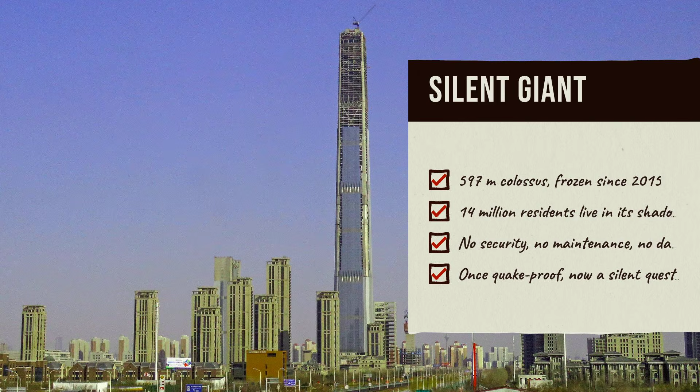For 10 years, a 597-meter skyscraper stood unfinished above a Chinese city of 14 million people. No security, no maintenance, no monitoring. Every typhoon season, the wind hit it. Every winter, the temperatures dropped.

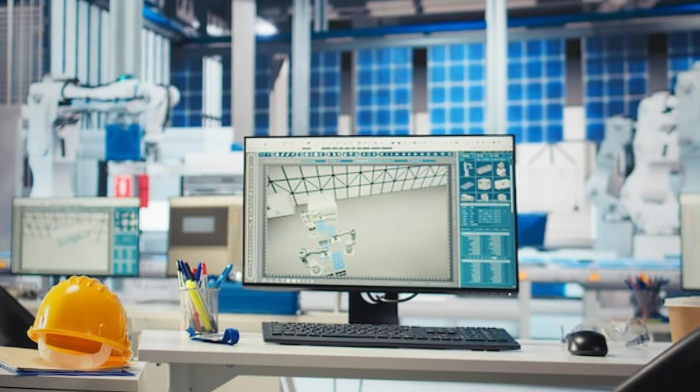The structural steel expanded and contracted, month after month, with no engineer watching the sensors. This building exceeded China's seismic safety code before construction even finished. Then it stood exposed for a decade. This is Goldin Finance 117, and nobody publicly knows what that did to it.

To understand how a $3 billion skyscraper becomes a ghost, you have to understand who paid for it. Pan Sutong was born in Shanghai in 1963 and grew up in Hong Kong. By his early 50s, he had built Goldin Properties Holdings into one of the largest real estate developers in southern China. Forbes estimated his personal fortune at over $25 billion at its peak. Pan wanted a trophy. In 2008, he commissioned the design for the tallest building Tianjin had ever seen.

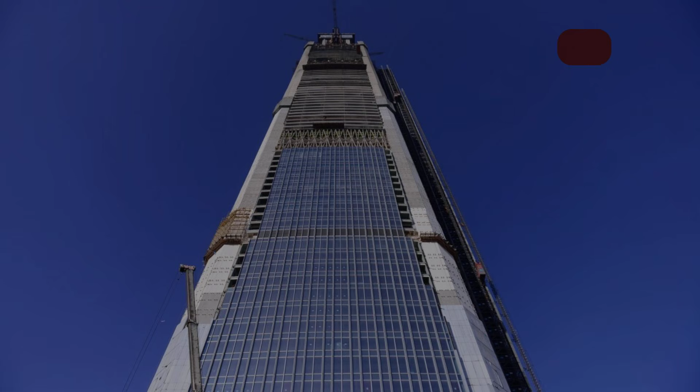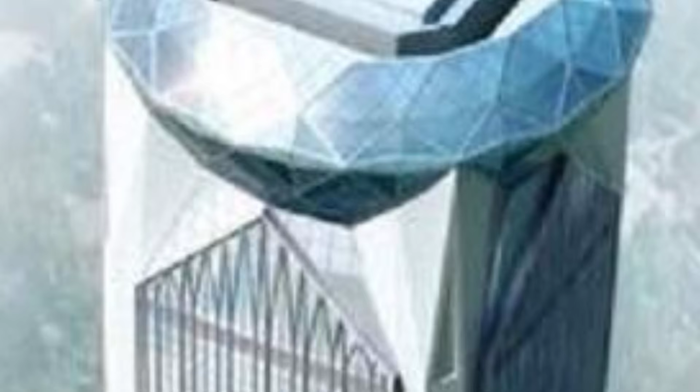597 meters, 117 floors, a sloping glass facade that tapered as it rose, giving the structure the silhouette of a walking stick. At the top, a diamond-shaped crown, roughly 80 meters tall, a glass atrium that would house a revolving restaurant, an observation deck, and an indoor swimming pool. All three would be the highest of their kind in the world.

The project was financed by Pan personally, secured against his stock portfolio and his broader real estate holdings. Tianjin was ready for it. The city's leadership wanted something that could compete with Shanghai and Hong Kong for international attention. Pan's tower would be the centerpiece of an entire development district. Luxury residences, polo fields, retail, hotels, all anchored by the tower at its center.

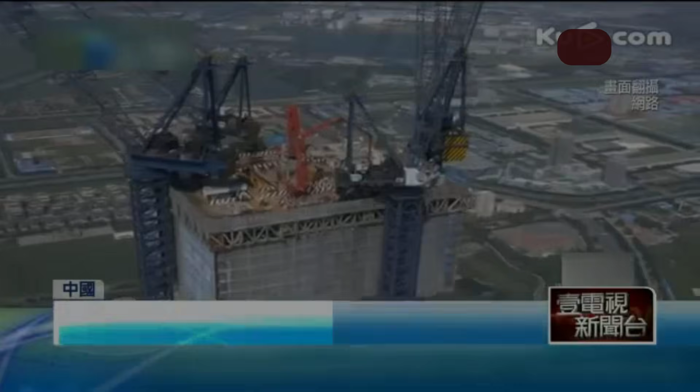Construction began. The mega frame rose floor by floor. By September 2015, the tower topped out at 597 meters. Workers were installing the steel skeleton of the diamond crown. The exterior glass extended past the 100th floor. Interior fit-out had begun. It was less than a year from completion. Then the Chinese stock market collapsed, and Pan Sutong's net worth fell off a cliff.

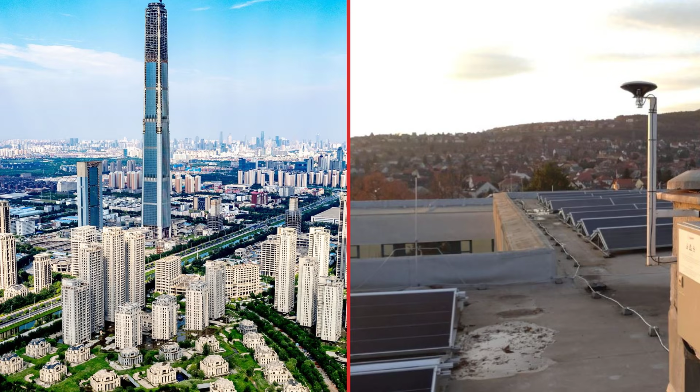Before we get to the crash, because the story of why this tower is extraordinary goes beyond who paid for it, we need to talk about what it took to build something 597 meters tall in Tianjin. Because this building didn't just push architectural boundaries, it exceeded the legal engineering limits of the country it was built in. The structural height to width ratio of Goldin Finance 117 is approximately 9.5.

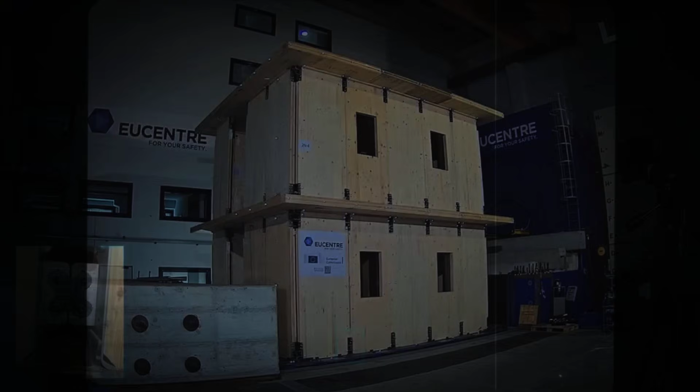That number matters. China's building seismic codes set explicit limits on how slender a tower can be in a high seismic zone, and 9.5 exceeded those limits significantly. The project required a special exemption approved by China's National Expert Panel before construction could legally proceed. In other words, the building is too tall and too thin to comply with the rules designed to keep buildings standing in earthquakes. The engineers solved this, or rather, engineered around it, with a system that had never been used at this scale in China.

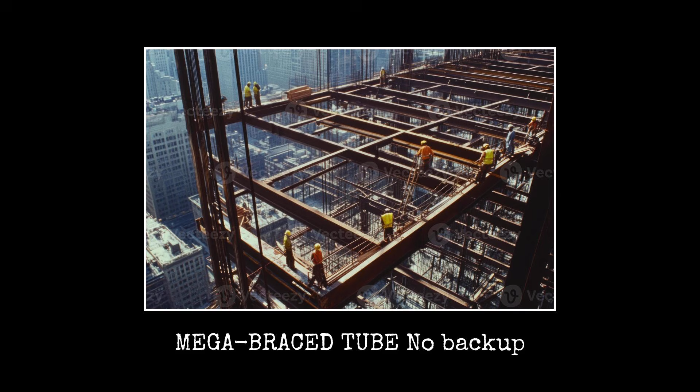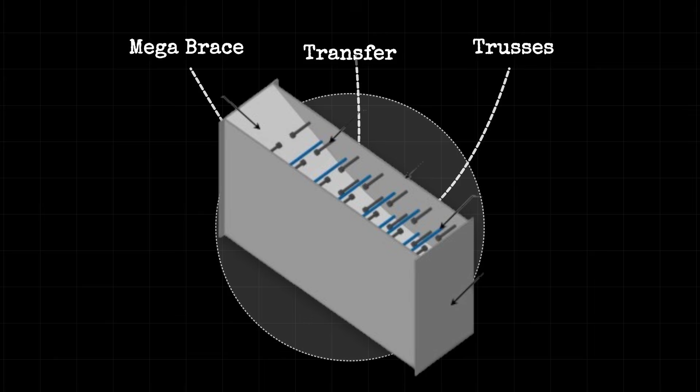The primary structure is a mega-braced tube surrounding a reinforced concrete core. 8 massive composite mega-columns rise from the building's corners and faces, tied together every several floors by transfer trusses and diagonal mega-braces. The central core contains composite steel plate walls, steel embedded within the concrete, to add shear resistance and ductility against lateral forces. This dual system, the outer mega-brace tube working together with the inner reinforced core, carries the building's vertical load while simultaneously resisting the horizontal forces of earthquakes and wind.

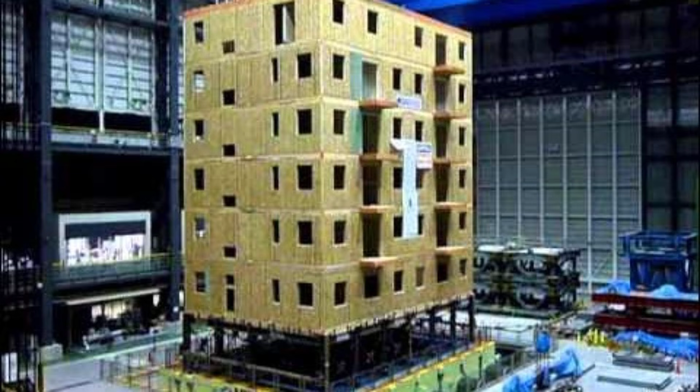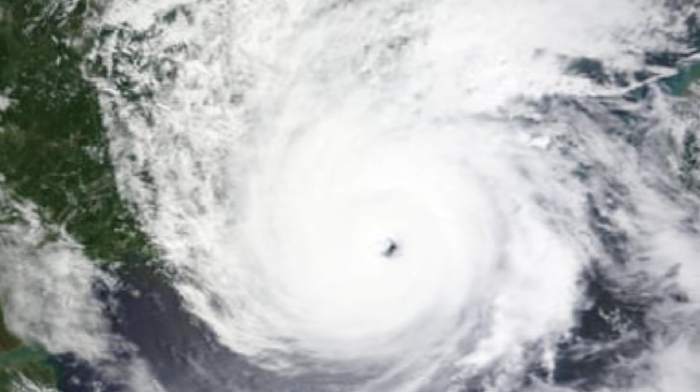Tianjin sits in a high-intensity seismic zone on the North China Plain. The design was calibrated for a severe earthquake, with a return period of 1 in 2,475 years. For wind, the tower had to withstand typhoon category events that periodically strike the Chinese coast. A tuned damper near the top, a massive suspended weight that swings opposite to the building's natural sway, was included to reduce movement during high wind events. Taipei 101 uses the same principle. But here is the detail that structural engineers still discuss.

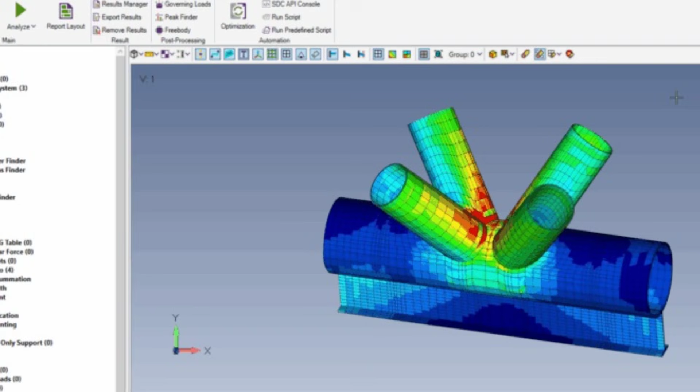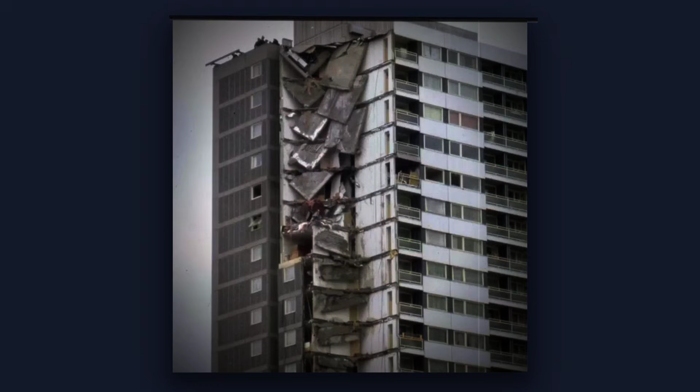Because the tower exceeds seismic code by such a margin, the entire design depended on every element of that dual structural system performing exactly as modeled. There was no redundancy built in via code compliance. The code was the redundancy. When the engineers exceeded it, they were betting on the precision of their own calculations, not on a regulatory safety buffer proven over decades. The building got its exemption, construction proceeded, but a 597-meter tower that required a special government exemption to be built legally is sitting on a narrower engineering margin than any building you can see from the street.

June 2015, the Chinese stock market begins to collapse. The Shanghai Exchange loses a third of its value in less than a month. Trillions of dollars in market capitalization disappear. Pan Sutong's flagship company, Goldin Financial Holdings, is hit particularly hard. On a single day of trading in late May, the company's value collapses by billions within hours. Forbes reports Pan's personal fortune fell from over $25 billion to a fraction of that within weeks.

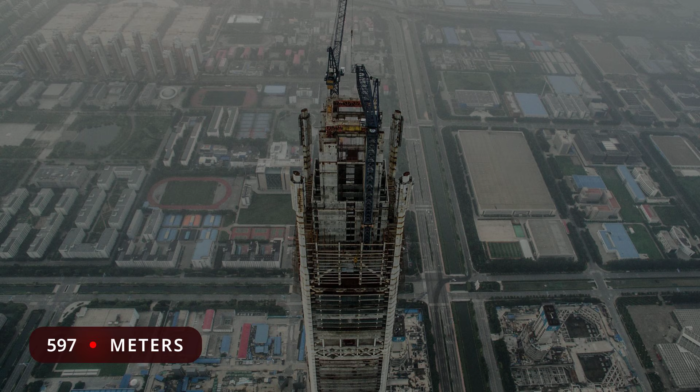The construction loans for the tower were secured against that portfolio. When the portfolio collapsed, the loans became impossible to service. In December 2015, six months after the crash began, the payments stopped. Contractors walked off the site. Workers left their tools where they stood. The cranes at the top of the building were locked in place, too expensive to remove, too complicated to leave running. The diamond crown, framed but unfinished, sat at 597 meters.

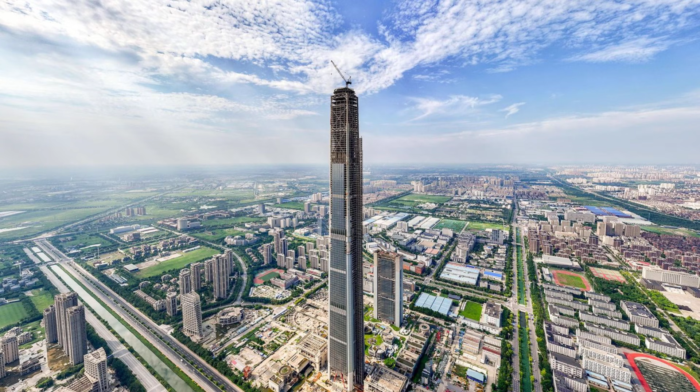Pan's situation deteriorated steadily after that. His Hong Kong projects ceased. Goldin Financial Holdings was delisted from the Hong Kong Stock Exchange in 2020. His luxury assets were auctioned. Pan himself largely disappeared from public life. The tower did not disappear. It couldn't. It was the 4th tallest building in the world.

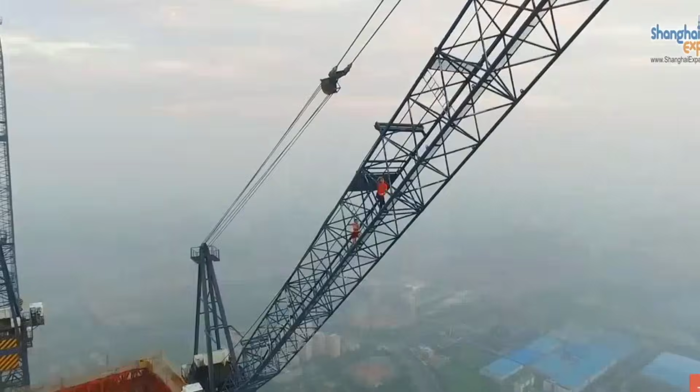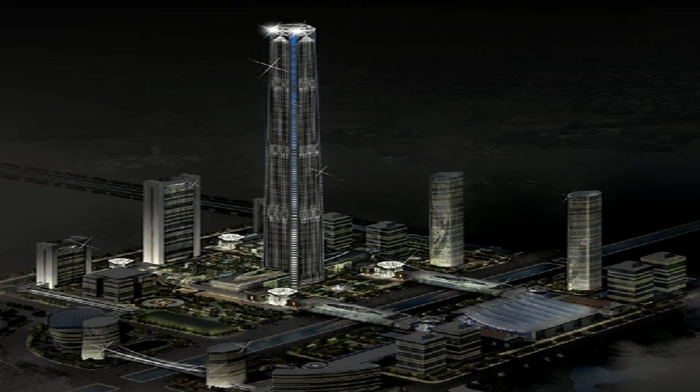What happened next was unexpected. The building became a destination. Urban explorers from Russia and China climbed the construction crane at the top. In 2016, Russian couple Ivan Kuznetsov and Angela Nikolau reached the upper structure and posted footage that went viral across Chinese and Russian social media. Base jumpers parachuted from the upper floors. The tower acquired a reputation in exploration circles as the ultimate unsanctioned target, a nearly 600-meter structure with no security, no management, and no completion date.

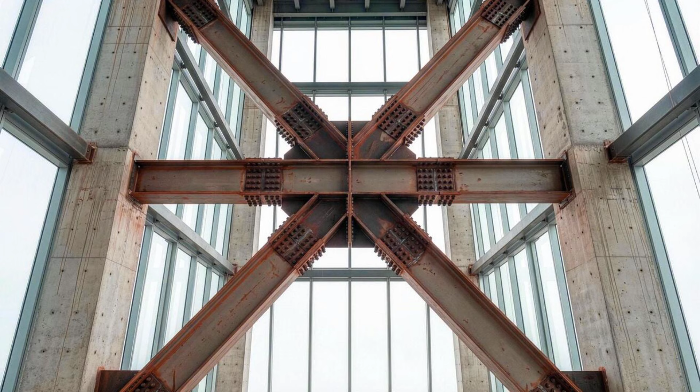In 2019, Guinness World Records officially certified Goldin Finance 117 as the world's tallest unoccupied building. It would hold that title for the next 6 years. Tianjin's city government made statements about reviving the project. Investors expressed interest. Nothing happened. The building stood above the Xiqing district, looking out over the flat North China plain, exactly where it had been when the workers left. Here is the question nobody in the official communications around this building has answered: what does a decade of unmonitored exposure do to a 597-meter tower that was already operating outside China's seismic code margins?

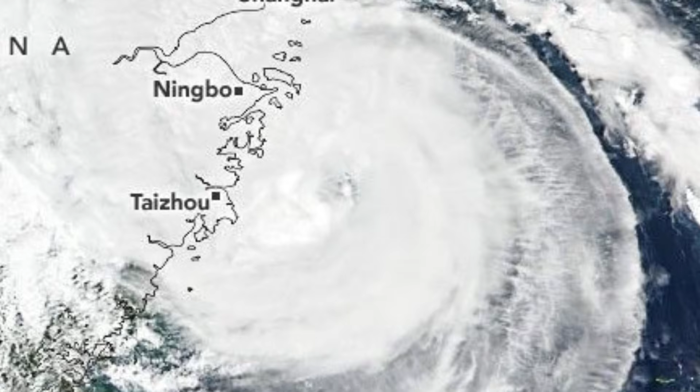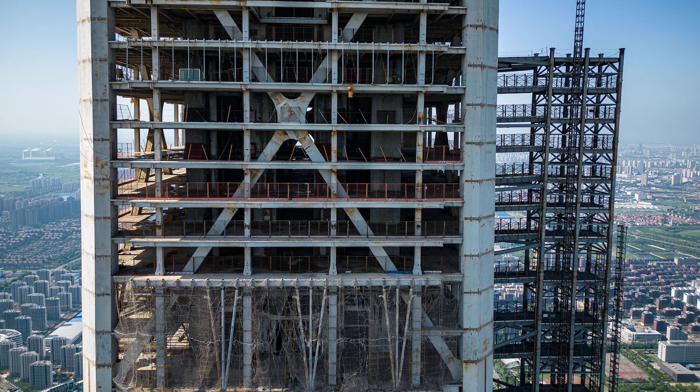Think about what the building experienced between December 2015 and April 2025. Tianjin sits in a high-intensity seismic zone on the North China Plain. It also sits within reach of typhoon category wind events that periodically sweep the Chinese coast. Every year of the tower's dormancy, those winds hit the structure. Not the finished structure, the partially finished one. The diamond crown was framed but not clad. The interior was an open shell. Wind loads on an incomplete building are different from wind loads on a finished one. The aerodynamic behavior changes when facade panels are missing and internal partitions do not exist yet to redistribute lateral forces.

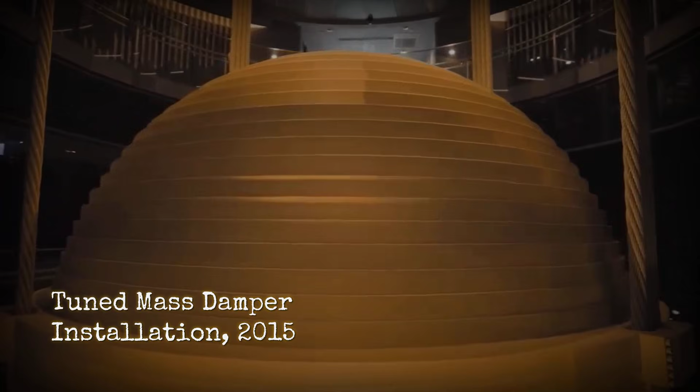The tuned mass damper near the top, the massive suspended weight designed to counteract sway, was installed. But a damper that is not being maintained in a building that is not being actively managed accumulates wear in its mechanical components differently than one in an occupied tower with a facilities team.

Steel fatigues under repeated stress cycles. The mega brace tube and the composite core were designed to manage those cycles within specific parameters. After 10 years of typhoon seasons with no engineer reviewing the data, those parameters are theoretical, not verified.

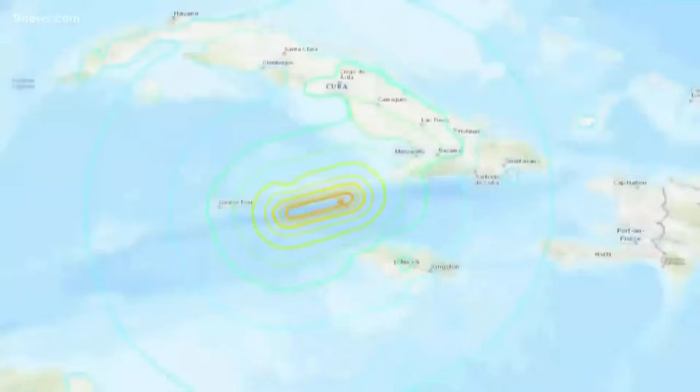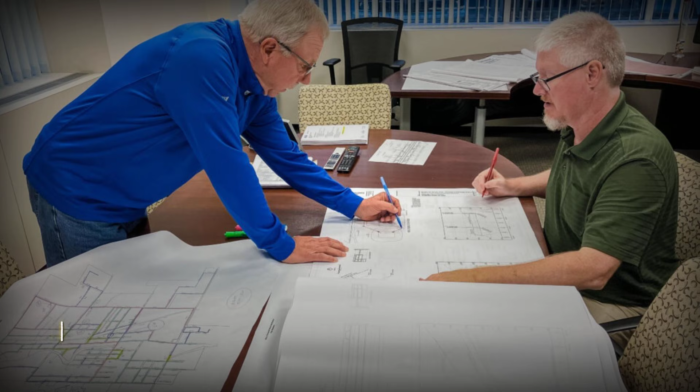And then there's the seismic record. Tianjin experienced a magnitude 4.3 earthquake in 2020, a magnitude 3.6 in 2022, and multiple micro-seismic events throughout the dormancy period. A building that required a national expert panel exemption to exceed seismic code, and that was then left unmonitored through 5 years of seismic activity, has an unknown relationship with those events.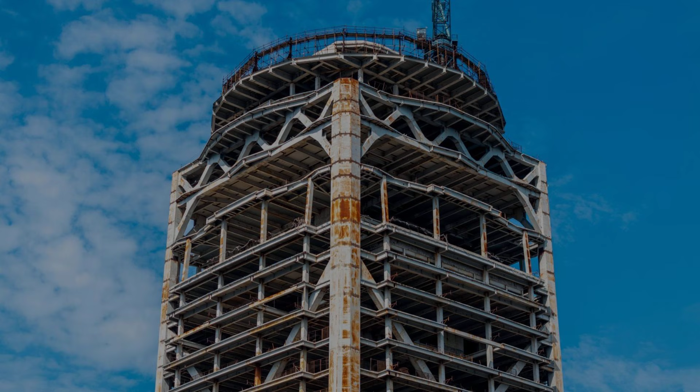None of this means the building is dangerous. The megaframe is robust. The structural system was over-engineered precisely because the code margins were thin. But probably fine is not the same as verified safe.

As of April 2026, when the cranes returned and workers began loading the structure again for the first time in 11 years, the first thing the new engineering team had to do was assess what a decade of exposure had actually done. That assessment is not public.

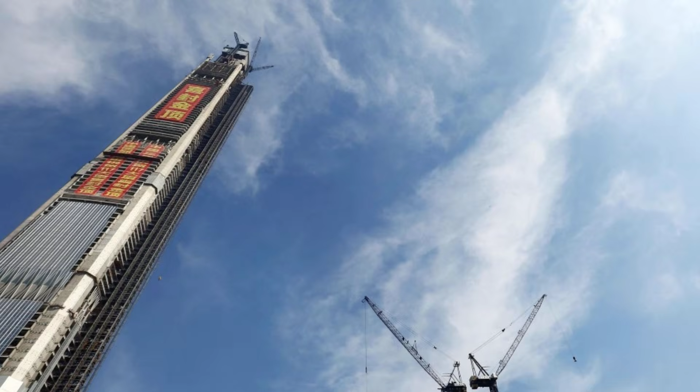Goldin Finance 117 was not the only ghost tower in China. The broader property crisis set off by Evergrande's collapse left hundreds of developments frozen across dozens of cities, but it was the most visible. And in 2021, China's government issued a national ban on new buildings over 500 meters, citing among other factors the economic and structural risks of super tall projects that exceed engineering code limits. A building that spent a decade leaning into the wind above Tianjin helped end an era of Chinese super tall construction. That's the consequence nobody mentions when they talk about one billionaire's bad bet.

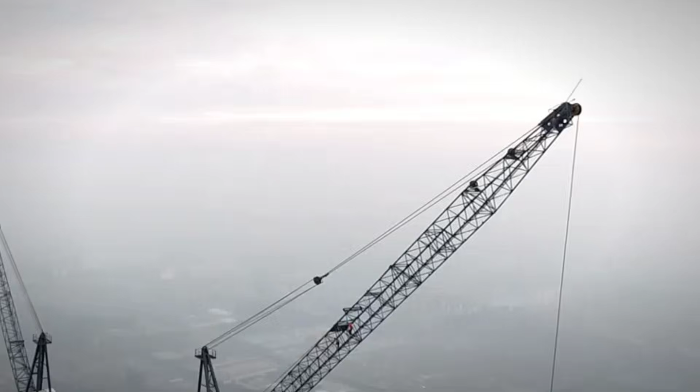In April 2026, the cranes came back. A consortium of state-backed investors organized by the Tianjin municipal government in coordination with China State Construction Engineering Corporation and China CITIC Group agreed to take over the tower's completion.

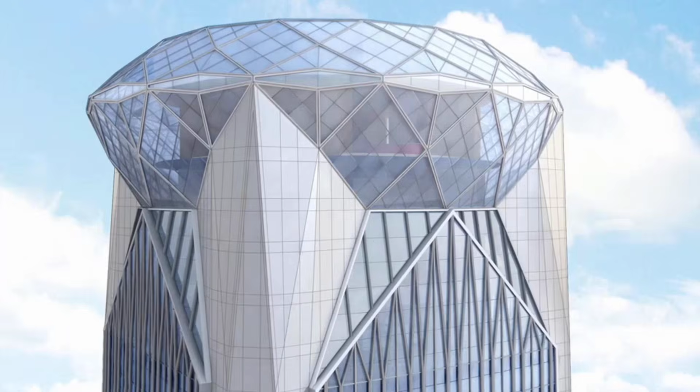In January 2026, Tianjin's party secretary, Chen Min'er, formally endorsed what they now called the 117 project. The original design was preserved. The architect's P&T group returned. A new contractor was hired.

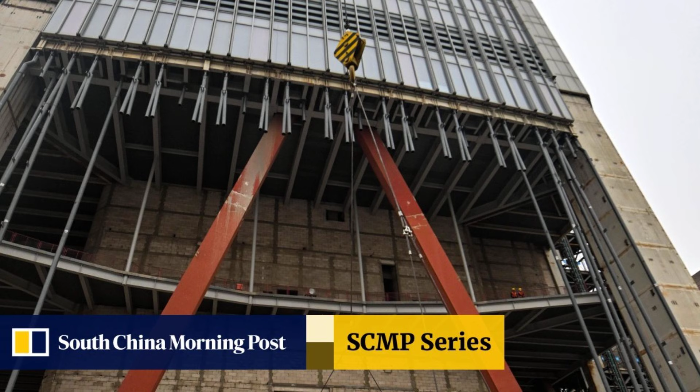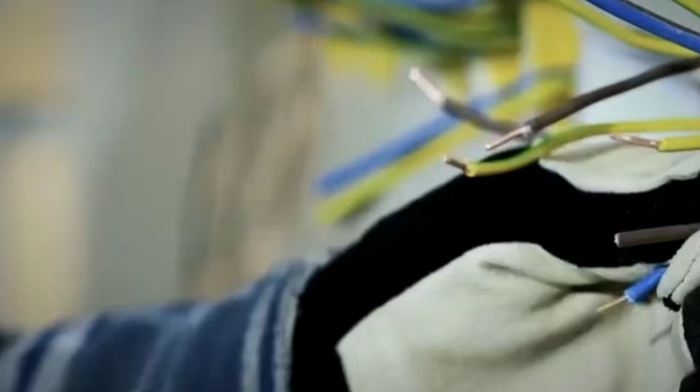By April 2026, workers were installing the steel structure of the diamond crown, the same crown that had been framed but unfinished since December 2015. Drone footage from the site shows welders and concrete crews active for the first time in 11 years. The skeletal diamond slowly taking shape against the Tianjin skyline. The target completion date is 2027.

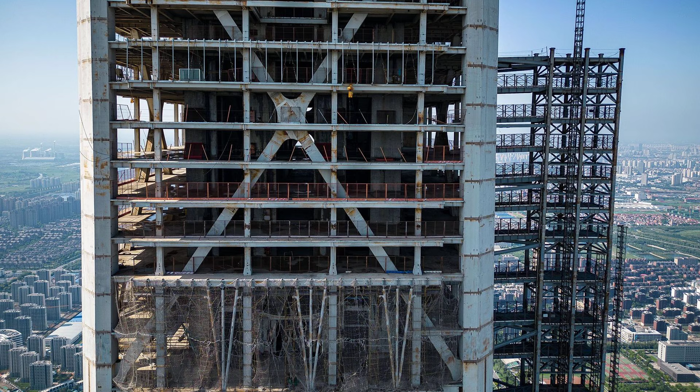If it opens, Goldin Finance 117 will be the only tower in modern history to spend a decade as the world's tallest unoccupied building, and then, in the same lifetime, enter the world's occupied list.

But the decision to finish it was never purely architectural. It was a signal to international bondholders, to domestic investors, to the broader Chinese property sector, which had spent several years watching developer after developer fail. The signal was, the state will not allow a 597-meter trophy tower to stand empty on a major city's skyline indefinitely, regardless of what happened to the man who built it.

Pan Sutong will not own the finished building. He no longer owns much of anything. The building he staked his fortune on will outlast his fortune. The diamond crown he never saw completed will eventually light up above a city that spent 11 years watching it sit unfinished.

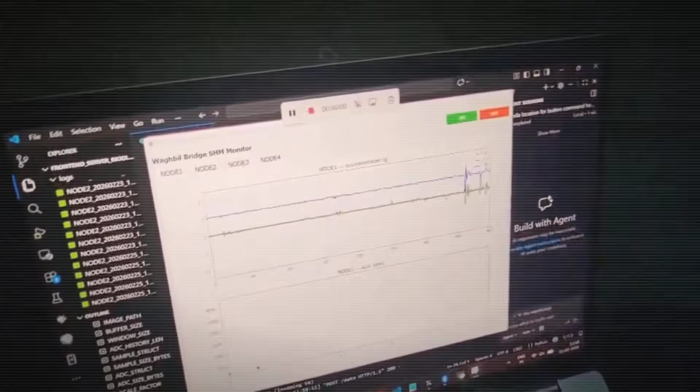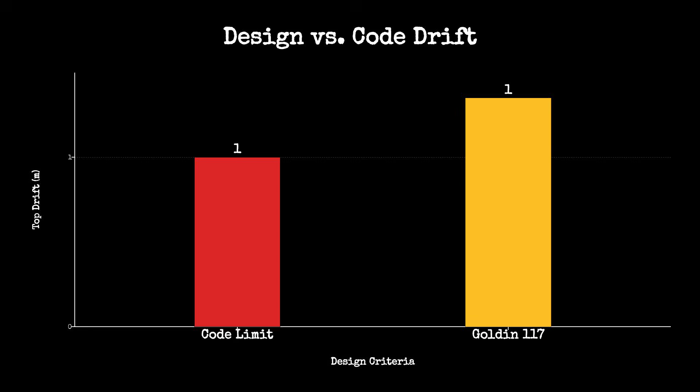And somewhere in the data centers where structural engineers store their monitoring records, there are files tracking the ongoing behavior of a 597-meter tower that exceeded Chinese seismic code by enough to require a national expert exemption and then sat dormant for a decade through winters and typhoon seasons, with nobody watching the sensors. What those files say about the structure after 11 years of stillness is not publicly known.

The completion schedule is 2027. The building has already waited 11 years. It can wait for the answer.